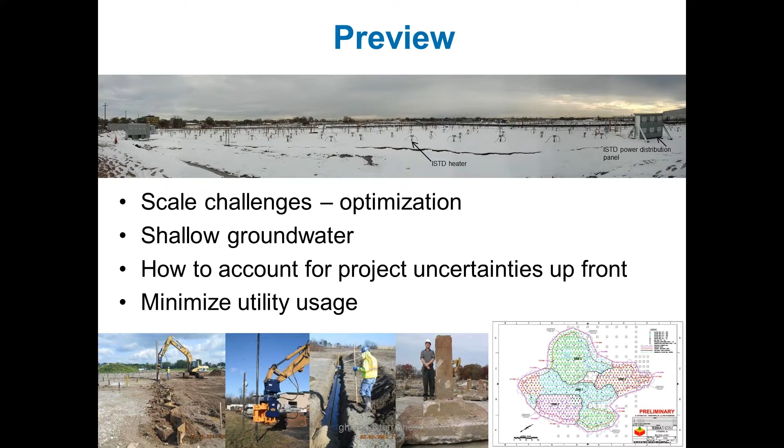All of this hard work was really not done by me, but by the people really working at the project. Ken Parker was our project manager, and you see Gary Engel and Jeff Levesque from O'Brien and Gere, and Ralph Villica from Villica Consult, and they were very instrumental in the way this project was successful. They're co-authors on this paper, which we are happy just got approved about a month ago for publication in Groundwater Monitoring and Remediation. The reference will also show at the final slide, so you'll have time to write it down then if you want to look this paper up.

So the Teterboro landing site had a lot of manufacturing and other things, and for the redevelopment that was planned, there was a 3.2 acre hotspot, and you can see it there in yellow inside the red square. The red square was the former building that was at the site, and a lot of chemicals were spilled underneath that building. It's right next to the Teterboro Airport, and you can actually see the Manhattan skyline from this site. If you look down on this drawing, you can actually see the Freedom Tower and all that.

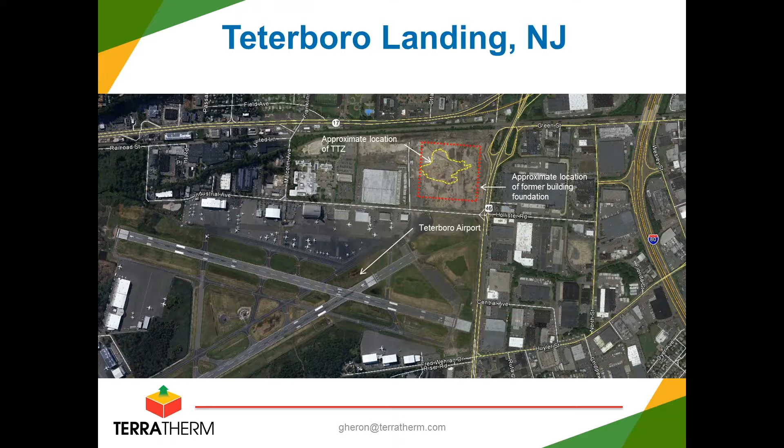So the 3.2 acre hot spot or source zone was divided into four zones actually, and you can see here different depths in the different little shapes. The deepest point was about 12 meters or 40 feet deep, and that's how deep the contamination exceeding 10 milligrams per kilogram was. In other areas of the site, it wasn't quite as deep, so we treated to a shallower depth. All of that, of course, to minimize the total volume and the utility demands of the thermal treatment.

The other reason for having four zones is that when the site is this large and towards the end you're collecting soil samples to confirm that you're done, you can't take soil samples over a 3-acre site in less than 3 or 4 days, and then you have the turnaround. So you really want to narrow it by having some zones, take all the samples in one zone, declare victory and stop heating that, and continue heating the other ones until you're done. Putting it in zones where each one had its own statistical analysis was a way to make that much easier for us towards the end.

So the contour of this was the 10 milligram per kilogram line for the contaminants of concern. You see them listed up there. We were expecting 30 to 50,000 pounds of mass to come out, and that was roughly what came out. The treatment goal was 1 milligram per kilogram for each of the chemicals inside this zone, from top to bottom.

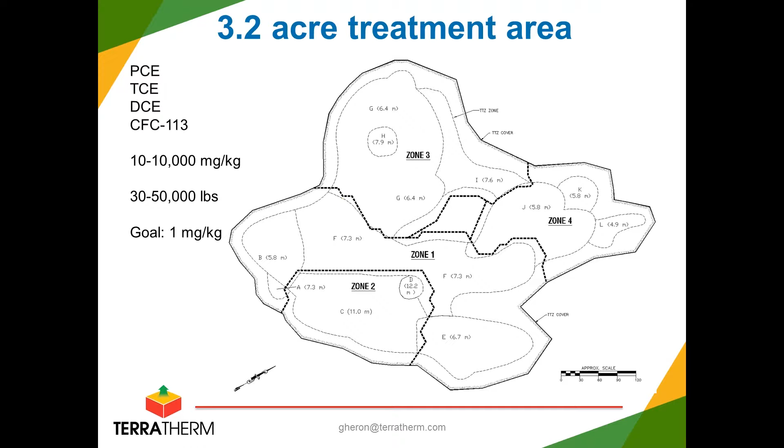So a pretty good objective there. This would allow for redevelopment of the site when these goals were met. The client and O'Brien and Gere chose in situ thermal desorption as the best, most effective thermal method for this, and we decided to go to what is T2 on the graph to the lower right.

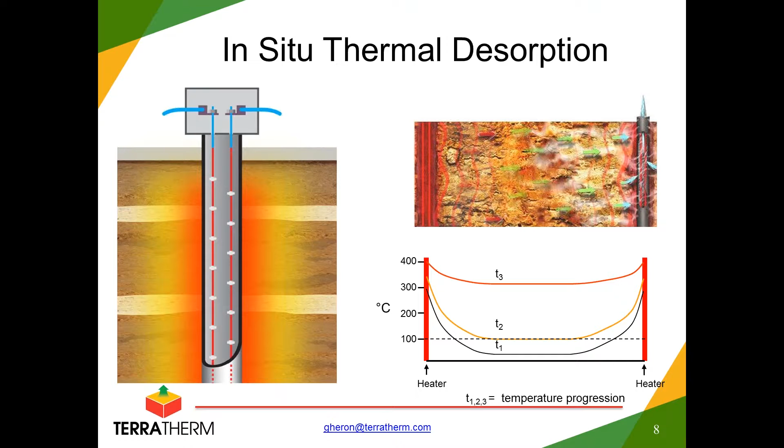So basically, we are heating the site to the boiling point of water. The heaters themselves get a little hotter than that, or quite a bit hotter than that, but 90 or more percent of the volume gets to the boiling point, and that's enough to get the TCE and PCE and the other contaminants to vaporize and come out.

In the field, it looks approximately like this. I've taken a simplified picture here with heaters with 15-foot spacing. You see a simple ISTD heater with a little box at the top. A cable goes in, a cable comes out. The green cables are grounding wires, and you see an insulated vapor cover. It's air-entrained concrete, and that's as simple as this process is.

We also have some multi-phase extraction wells, and they all are attached to the vacuum manifolds, and the fiberglass pipe you can see there hanging is such a one. It's a vacuum manifold. We also have a liquid manifold when we're pumping water at these sites.

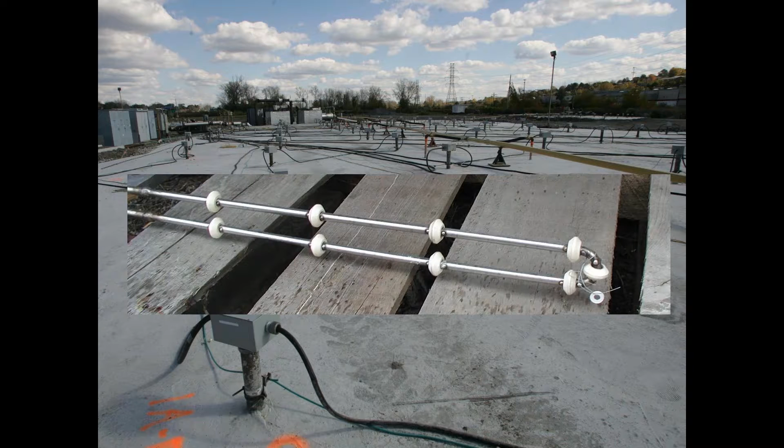Down and inside each heater casing is a very simple resistive rod that is our heater element, and electricity runs inside of the casing through this stainless steel rod, and it's protected from shorting out by these ceramic beads you see along the length of the hairpin heater, and it is operated by thermostat controls, just like you have in an oven.

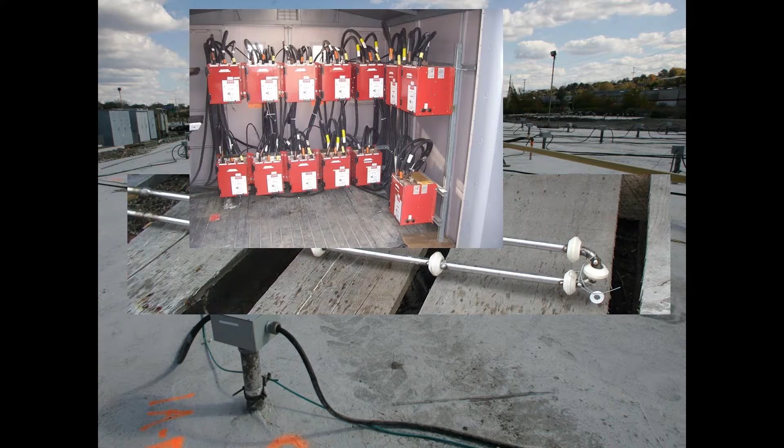As an example of this, silicon control rectifiers like the one you see here can be used for that. So they simply sit and control the electricity to the heater circuits, and turn them on when you want more heat and turn them off when you're hot enough in the well, and it operates automatically. We can also program it to pull more power into the ground at off-peak times and less during high demand periods to even out the load for the grid when we have a big project.

This site had very unique challenges, and on this slide, the black punctuated line right underneath the blue fill layer is the original land surface, and as you can see, the blue line is the water table. At times it was actually above the ground, and one of the things that was really challenging here was the fact that the groundwater actually started rising in the middle of this project, and by the time we had placed the fill layer you see on top, the water level was up there, and I'll talk about that a little bit more.

You see the heaters go from top to bottom, and we have multi-phase extraction wells that also are screened across the treatment zone, and horizontal vapor collectors which we placed in the fill layer. We had to create that vadose zone to have a place for all the steam and vapors generated to come up and get captured.

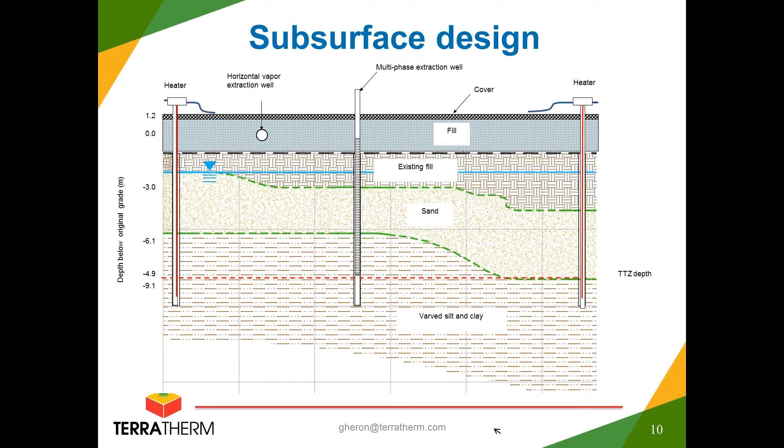So the site had about 900 heater borings to cover the 3.2 acres. We put in 35 multi-phase extraction wells, and as you'll see in a moment, we were happy we did that. And then we had 116 horizontal SVE wells placed in the fill layer, and 80 vertical strings for temperature monitoring with thermocouples from top to bottom.

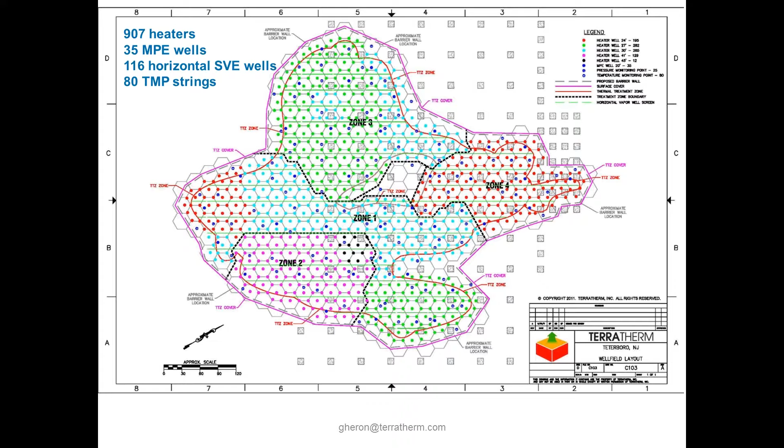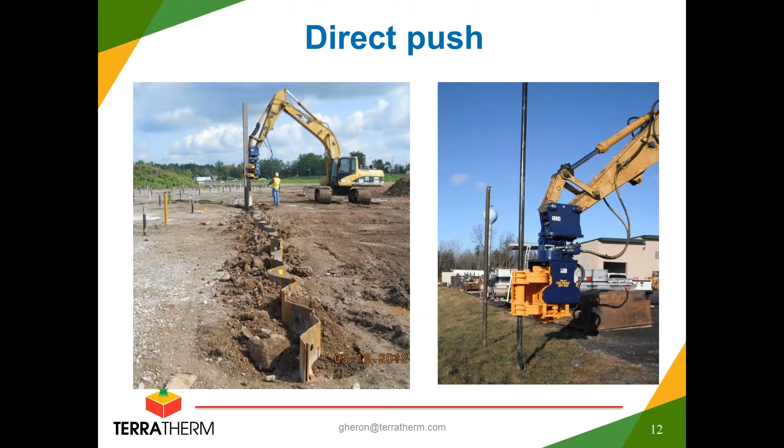And what that did was it reduced the drilling cost tremendously, and also there's no cuttings when you do it that way. So just an indication for other sites, if you can do MIP investigations or CPTs or other direct push with a 2-inch probe, you can, with a little more power, probably also install our heater casings with similar direct push methods, which in this case saved roughly $500,000 compared to drilling, and then you don't have the off-site disposal of the cuttings either.

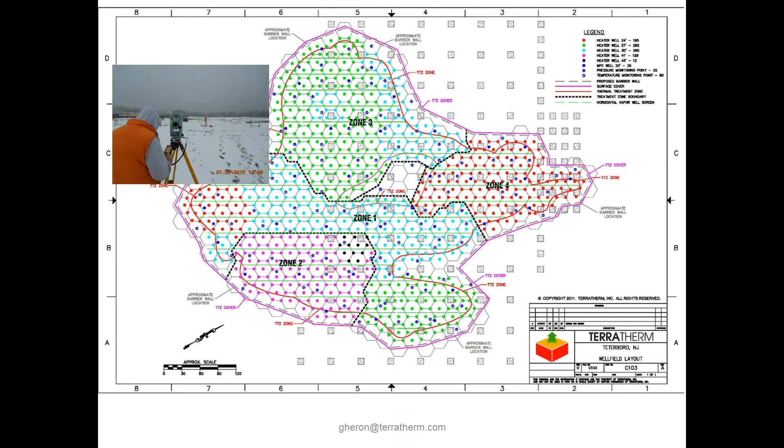So the site used to have a huge building, and what you see here in the little gray squares are footers from the original building. So when we were about to start the drilling phase, we went out there and surveyed in all those locations for the heaters, and we had to try to avoid hitting these old foundations with a direct push method. And so some holes were dug to verify where those were, so we knew that the survey had the right grid, and some of them were actually excavated.

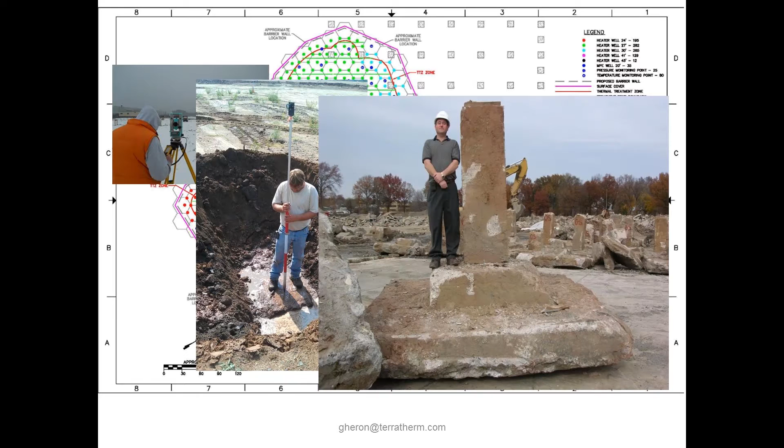And here's an example of one, and you can imagine that it's nice to not hit those when you're drilling and installing your heaters or your wells. A lot of them were left in place and simply heated and treated along with the dirt around them. So they didn't present a remediation challenge, but of course they presented a challenge for installation of the heaters and the wells.

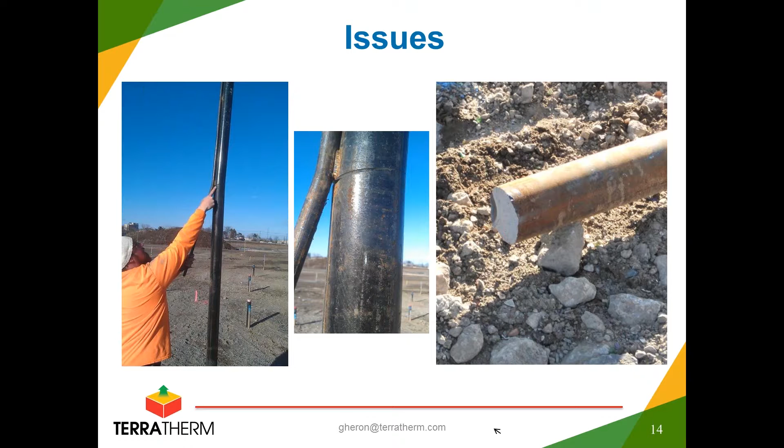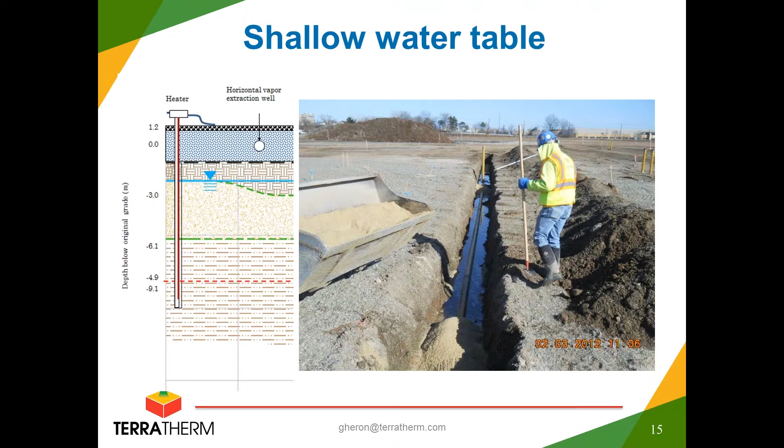So in this case, we used the 35 multi-phase extraction wells we had also installed, and we had an additional 30 days or so of liquid extraction before we started heating. And that's because when you start heating and you generate steam, you need to have pneumatic control, so you need to have your vacuum extraction screens exposed. So you couldn't have them drowned like you see in this picture, so that's why we had an additional month of extraction before thermal treatment began.

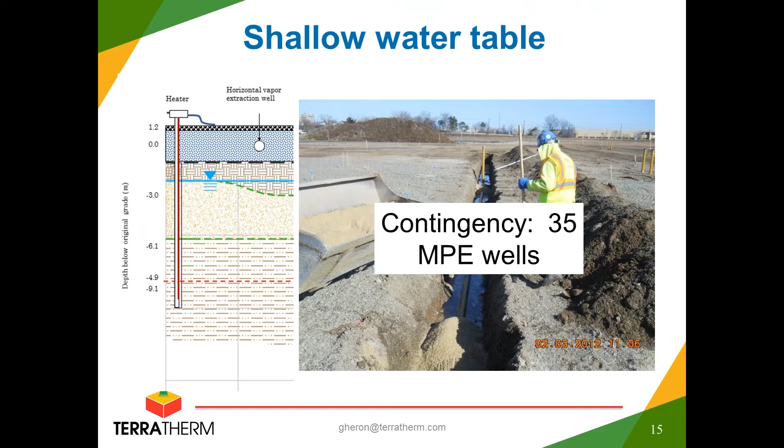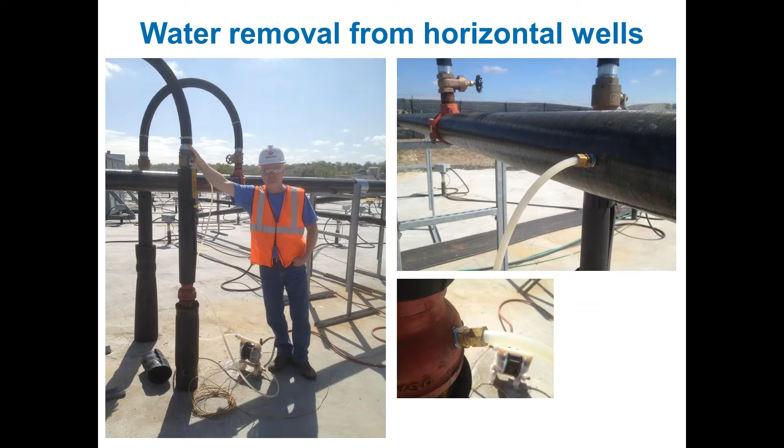So Steve here on the left is holding the valve, because it wasn't flowing, it was cold. But after you evacuate them by pumping the water out, they would start to flow steam, and they would work again for pneumatic control and for vapor extraction.

So one thing on a large project, and actually also on any thermal project you have to be aware of, is whether the groundwater will flow across your zone and whether it will make it hard to heat and reach your target temperatures, and also whether you potentially could have some of it escaping from your treatment zone. So we model that, and these are some sketches just from a setup of a model. Down now you can see just a schematic.

If you have the water standing still here on the left, you can get to your treatment temperatures fine. We can model, say, a 5 gallon per minute flow across the treatment zone at a certain location. The middle figure shows how, when it comes in from the left, you'll have some cooling happening upstream, and you won't be able to get to your treatment temperatures where the water is coming in. You might lose a little bit of water on the down gradient side unless you're pumping.

And on the right, you see more of a problematic zone. We modeled 10 gallons per minute escaping there, and you see at that point, if we're not pumping enough, you would have warm water, potentially rich in your solvents, leaving. So it's really important to know about these things up front and build into the design methods of hydraulic containment.

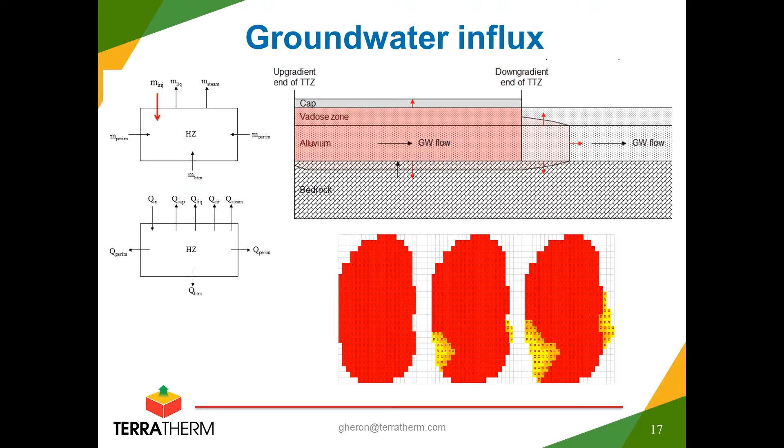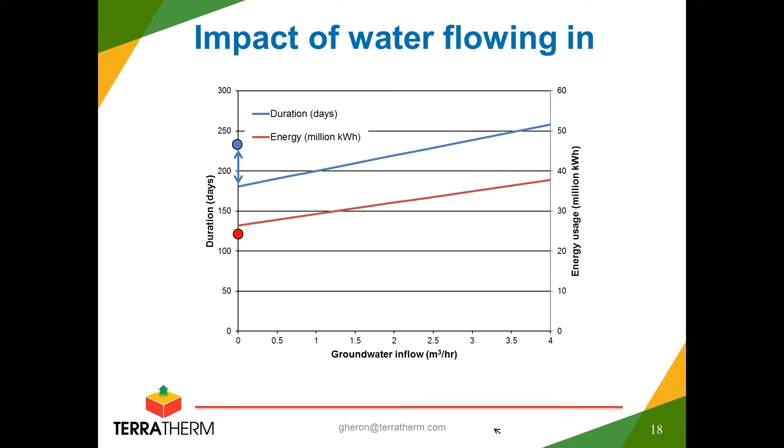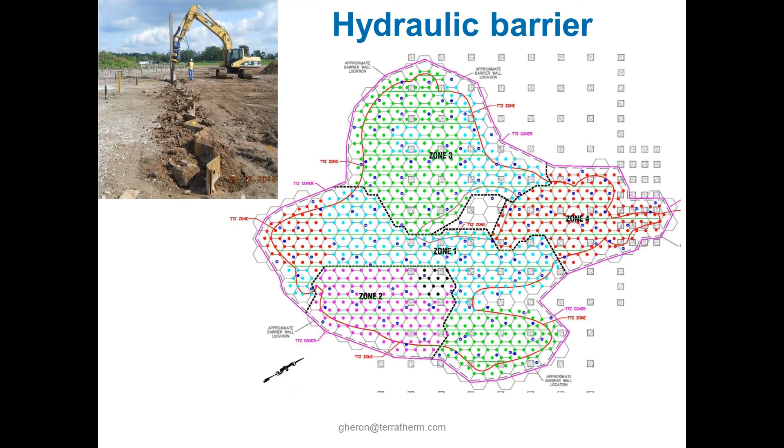But generally, this kind of analysis was used to say, okay, if we can stop the groundwater, we have a major improvement. And the client decided, yes, we want to prevent the groundwater from moving during thermal treatment. So the decision was to put a sheet pile wall around the whole thing, and you see it in pink around the edges, and you see a picture from when it was installed. And it was the same machine that put in the heater casings, so it made it a little easier that we were pushing both the sheet pile wall, tied into the clay below, and the heaters in with the same rig.

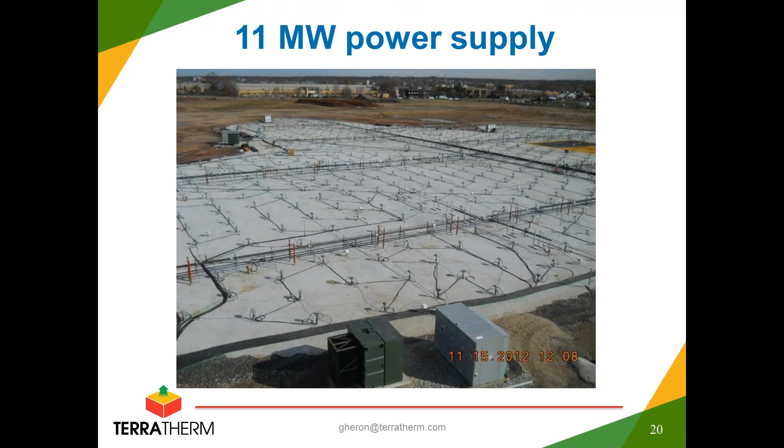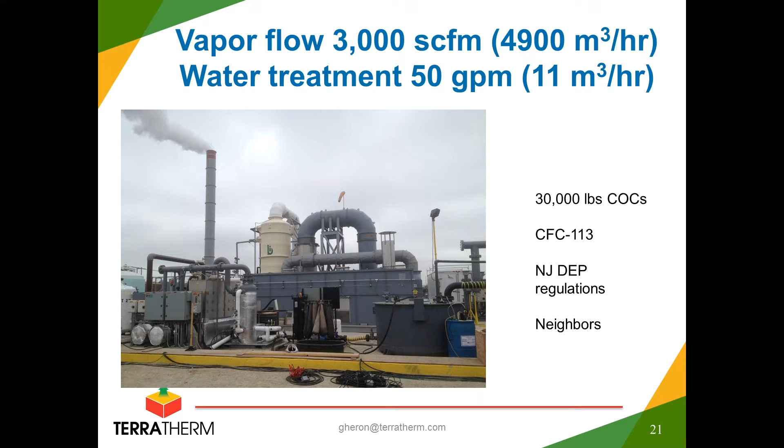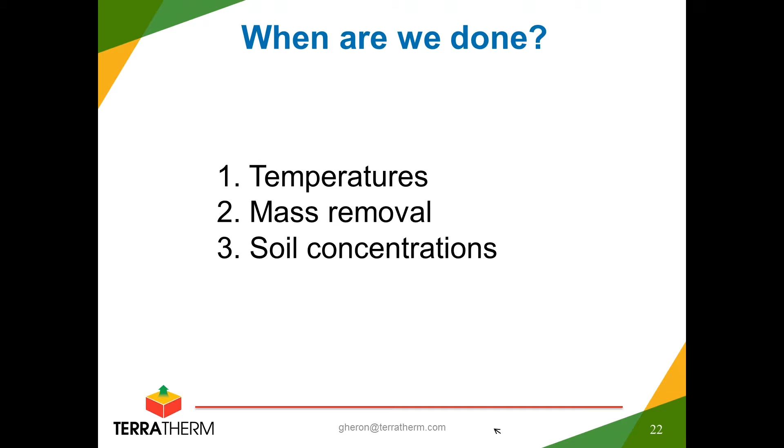So on a big site like this, it really matters when you are finished with your treatment. So what did we look at? We looked at temperatures in the ground, we looked at the mass removal trend, and then we looked at the final soil concentrations, which was the real strong metric that everybody was interested in so that redevelopment could move forward.

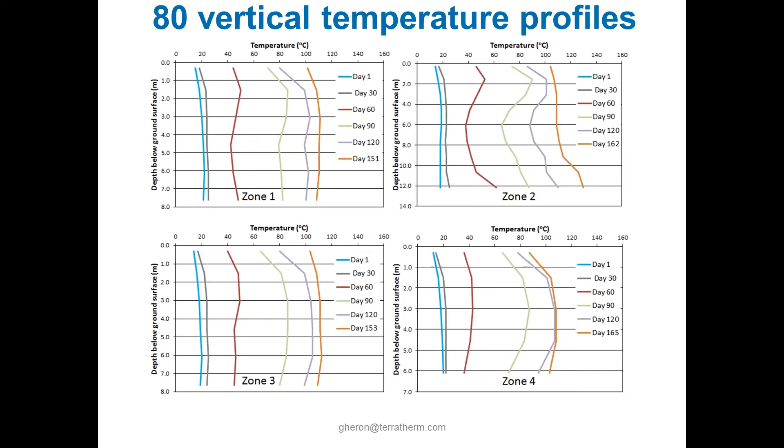Temperatures, I show just example average temperature profiles from the 4 decision units I showed you before. As you can see, temperatures climbed up nicely from top to bottom and reached the boiling point of water and slightly above 100 degrees because there's a little pressure as you move below the water table. In general, we were really happy with the heating, and we got nice proof that we had heated the whole 3-acre site down to as much as 40 feet to the target temperature, which was boiling. And then we kept it there for a while and took the confirmatory soil samples you'll see in a moment. Before doing that, we needed to verify that we heated everything.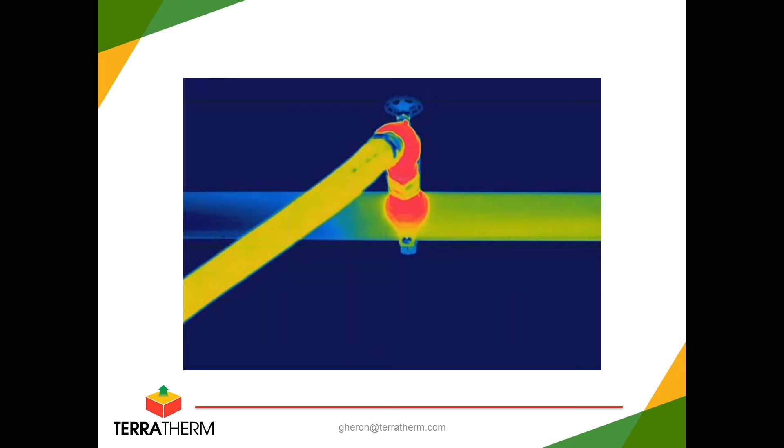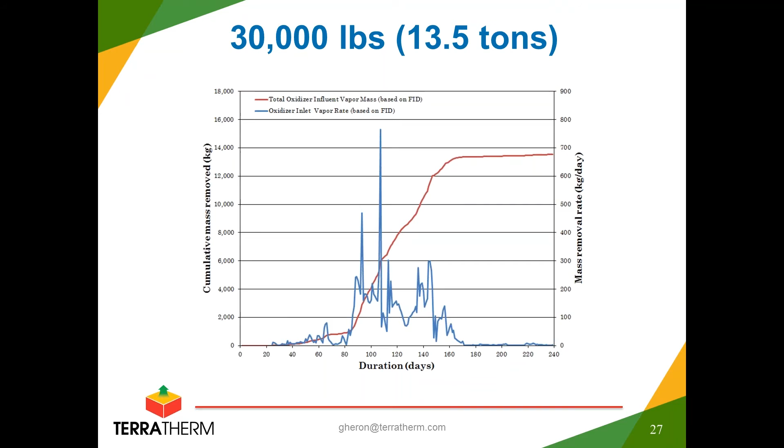So overall, we got about 30,000 pounds or 13,500 kilograms. And as you can see towards the end, very little was coming out. And we just had that one little zone that was recalcitrant, and around day 210 we got the extra heaters put in that area, and you can maybe see a little blip down there in the blue curve. A little more mass came out, and then the goals were met, and we were able to turn off the system.

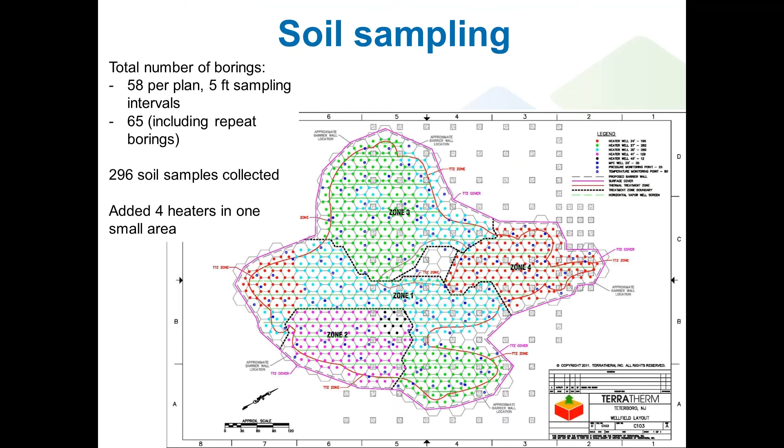Of course, we had to prove it, so there were almost 300 soil samples collected, and they were collected in all kinds of depths and over all the zones. You can do it with a compact rig that goes in between the heaters. You get intact cores out. They're lined and they get cooled off. And we have EPA approved methods for doing that, and then for extracting and sampling the material under cool conditions. And when we do that, we get really reliable soil concentration data.

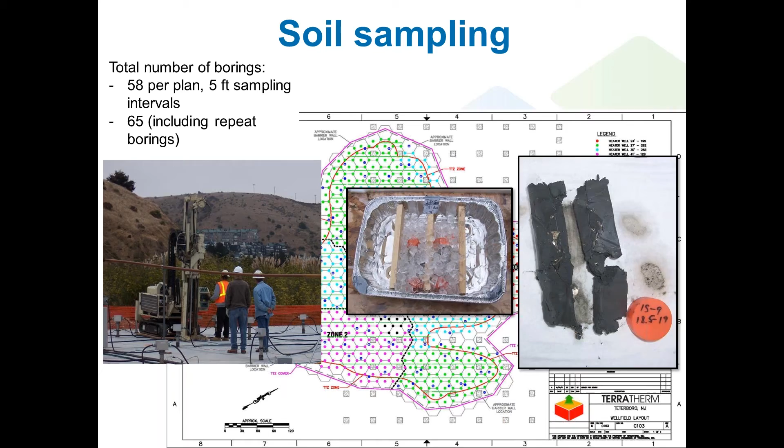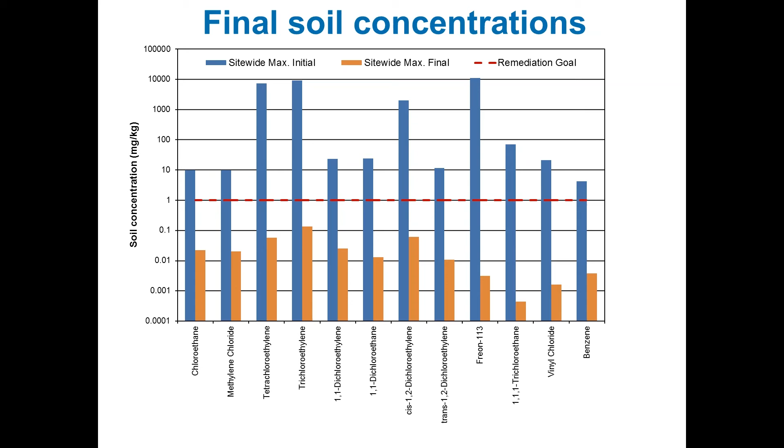That's another metric that scales reasonably well with size, but it's kind of a new metric for waterlogged sites like this one that were saturated from top to bottom, and it was pretty astonishing that we could get the power usage as low as this. So good result for that, and the energy bill was lower than expected.

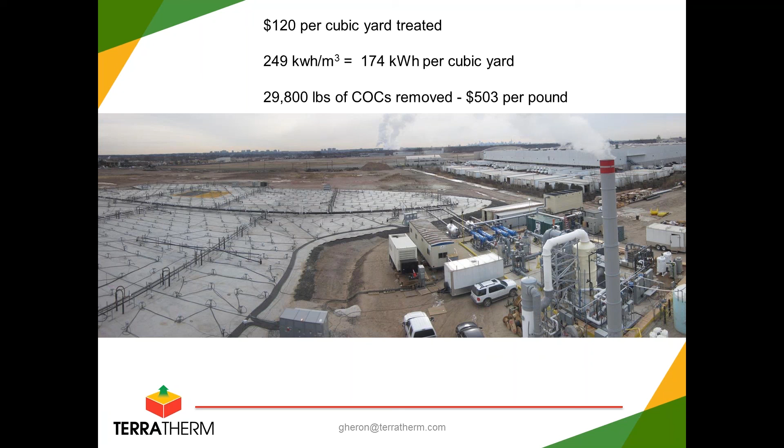And as I said before, roughly 30,000 pounds removed, and for the thermal part it was about $500 per pound, which can sound like a lot, but the driver at the site was so strong that the redevelopment was much more valuable than the cost of the remedy, and the only other reasonable alternative was excavation, and we don't know exactly what that would have cost, but it would have been extremely difficult and also extremely costly with the shallow water table and the sheer size here.